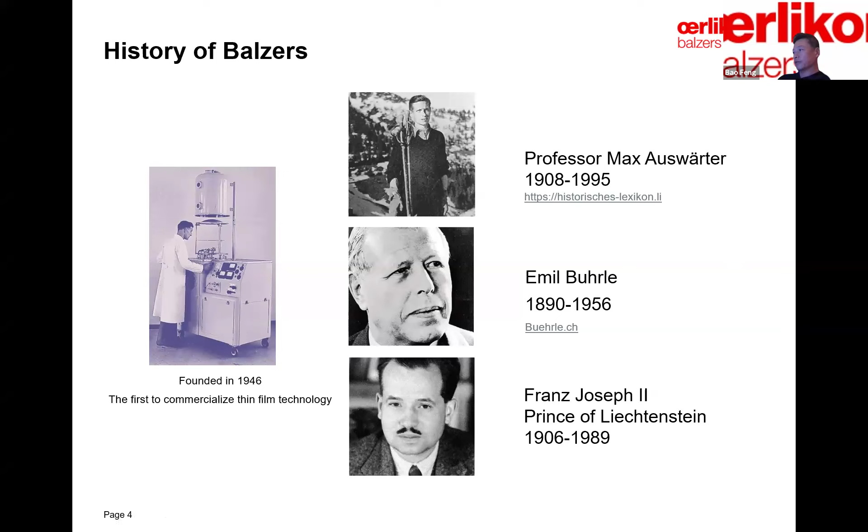Balzers was the first company to commercialize PVD technologies for industrial applications. You can see that small bell jar-shaped coating reactor in the 1940s and some manual operations around it. The company was founded by three brilliant individuals: a university professor from Liechtenstein, the CEO of Oerlikon—the mother company at that time—and the Prince of Liechtenstein. If you're interested, feel free to check out their bios from the internet. I believe there are some interesting stories behind each one of these individuals.

And of course, over time, our company has grown to a much bigger size. Now we have over 5,000 employees around the world in 37 countries, and we have over 1,300 coating machines installed around the world. We're truly a global company at this point.

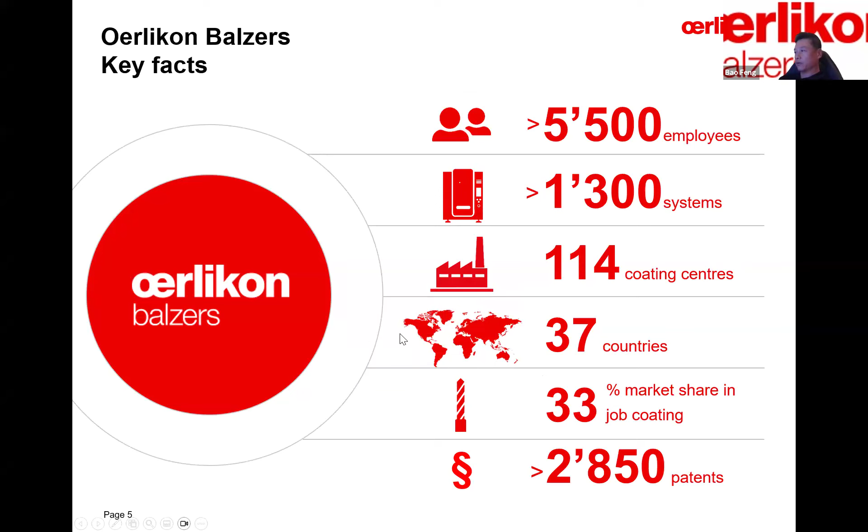So the market segments we cover are pretty much everything: cutting tools, molding tools, automotive components, aerospace components, medical, semiconductors, even luxury goods with decorative coatings. If you look around yourself, most likely some items are either coated by us or our coating has been involved in the manufacturing processes for those products.

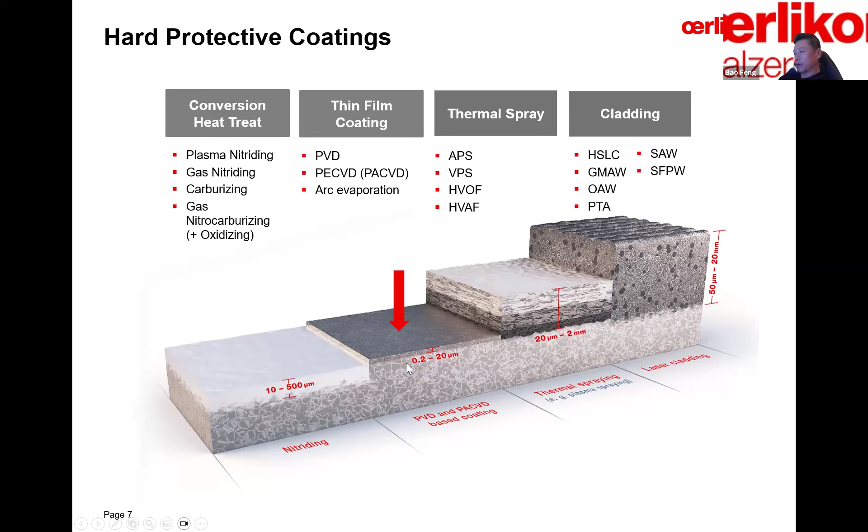What kind of products and services do we provide to our customers? Under the Oerlikon umbrella, these are the coating technologies we offer: we provide coating material, coating services, and coating equipment. For Oerlikon Balzers, we especially focus on this red arrow pointing to PVD coatings. We also do a little bit of conversion coatings, like plasma nitriding and carburizing. Those techniques we typically use to provide strong support for the PVD coating on top, for some special applications.

When we talk about PVD coatings, its materials family has a set of special properties. One of the special properties is the thin geometry. Take a human hair as an example, it's 100 microns thick, but typical PVD coatings are sub-micron to a few microns, a very small fraction of a human hair.

For that reason, a lot of our customers take advantage of PVD coatings. They use it as a band-aid solution, meaning they don't need to change the component geometry to accommodate the coating thickness. They can simply apply this coating on an existing design to see if it will work better or solve the issue. That's also the reason why people use thin film coatings interchangeably with PVD coatings.

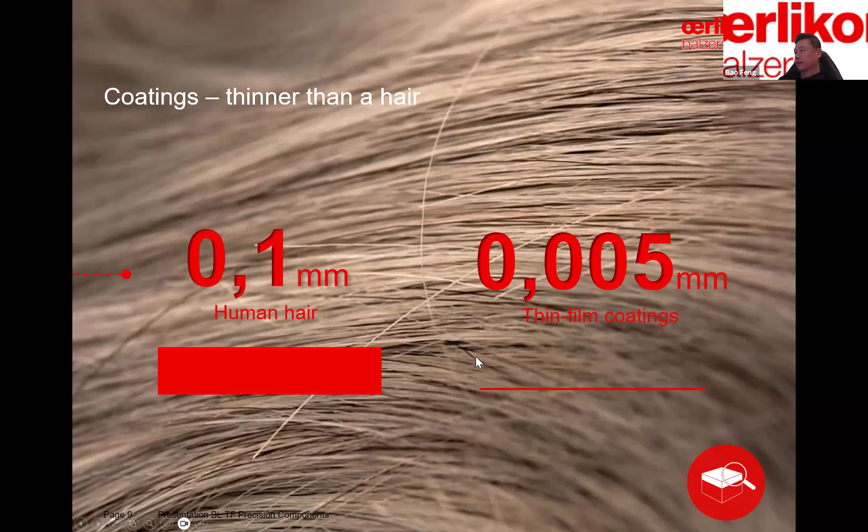The types of applications we normally deal with are often tribological in nature, meaning about friction and wear. For this type of application, we're dealing mostly with two material categories. One is crystalline ceramics, mostly cubic structure, transition metal nitrides, carbides, or oxides. Their properties are straightforward - very hard and non-metallic. So they can provide erosion resistance, abrasive wear resistance, adhesive wear resistance to the components, and sometimes oxidation resistance because ceramics in general are inert to the environment.

So I will spend more time talking about the other material category, which is carbon-based coatings. They're mainly made of amorphous carbon. But at the same time, they contain some sp3 electron bonded structure, like we find in diamond, and some sp2 electron bonded carbon, which we often find in graphite. I believe this content is normally in short range order, meaning they're very small, and there's a very small quantity of them in this type of material.

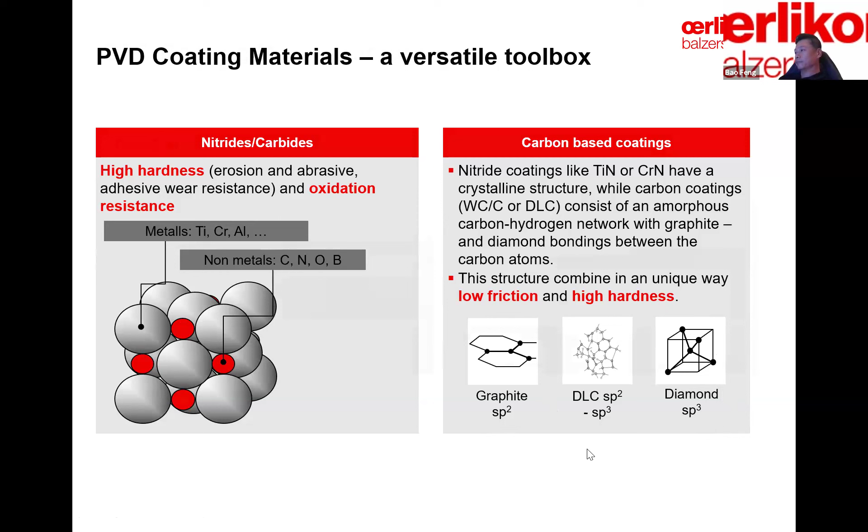For materials engineers, this is probably exciting, but if you're not a materials engineer, I'm sorry to bore you to death. This is titanium doped amorphous hydrocarbon, or titanium DLC. This is a cross-sectional high-resolution transmission electron microscope micrograph. You can see the atomic level resolution here, and those clear lattice fringes representing the titanium carbide crystals.

On average, the size is about 2 to 5 nanometers, embedded in an amorphous carbon matrix. So this is proof of this nanomaterial - look at those clear lattice fringes, really impressive. And why does nanomaterial matter? Because typically nanostructured materials bring in a different set of properties, for example higher strength, higher crack resistance, or different surface energies. These properties can be used for material improvement or different functions.

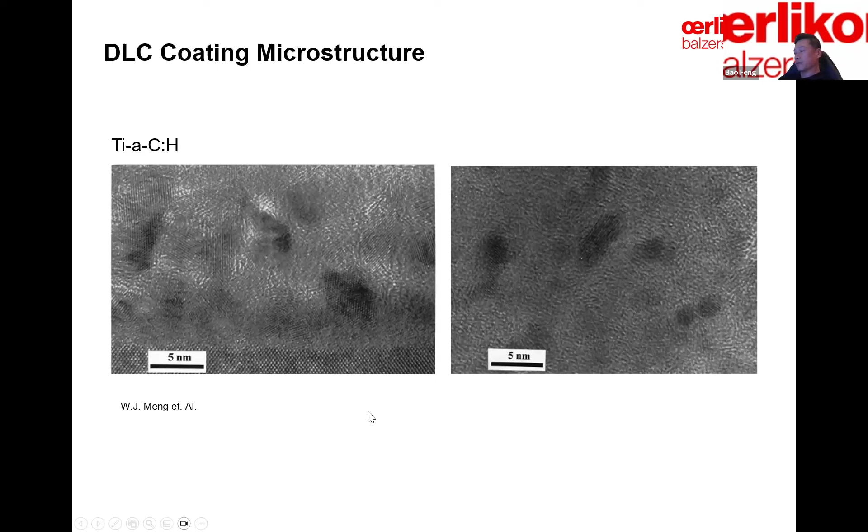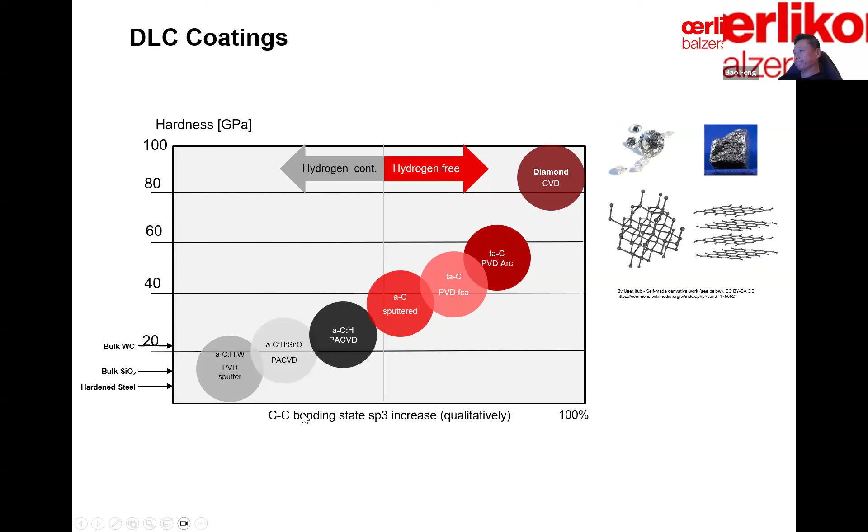So we talked about the thin geometry and extreme hardness of DLC. Another special property of this coating is low friction. This is an early study by Ken Holmberg, the author of the coating tribology textbook.

He was trying to compare DLC coated steel against non-coated steel in a sliding or tribometer test, a reciprocating linear tribometer test, also under different lubrication conditions - dry versus oil 1, a mineral oil, and oil 2, a hydraulic oil with EP additives. The key point here is that with the DLC coating, you can bring the friction coefficient of the steel down from 0.6 level to about 0.1 level, similar to the reduction when you apply traditional oils or oils with EP additives.

So what that means is for some dry contact conditions, you can use DLC to replace the traditional ways of lubrication.

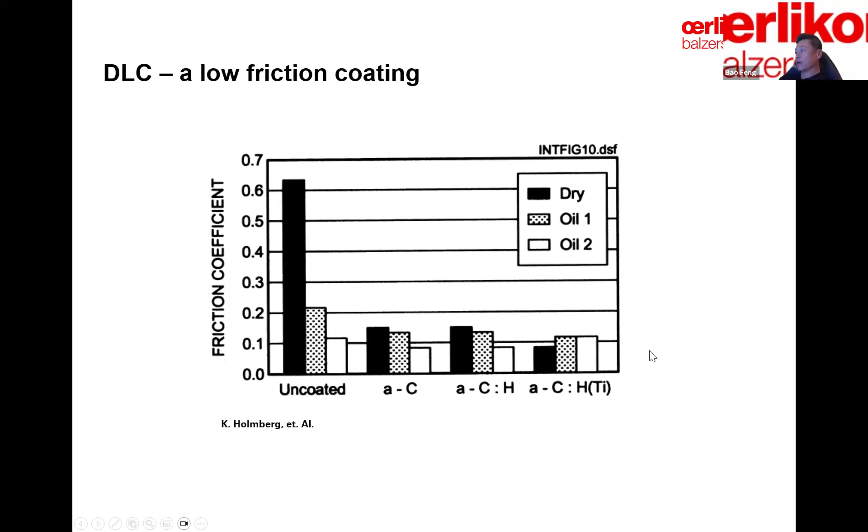So why is there low friction for DLC? People at Naval Research Lab performed a creative experiment in the early 90s. What they did was use a DLC coated steel ball sliding against a glass slide, and because the glass slide is transparent, they were able to use Raman spectroscopy to look at the contact interface from the other side.

What they were able to see was that during the breaking-in stage, there was a transformation in the transfer film from an amorphous carbon structure to a graphite structure.

Of course, we all know graphite is a good solid lubricant due to its layered structure and ease of shear. We know many of those solid lubricants like tungsten disulfide, molybdenum disulfide, or PTFE. But the difference with DLC is that it will last. It has high wear resistance while providing low friction at the same time.

How does that low friction behavior compare to traditional surface engineering technologies, for example hard chrome or nitriding? As you can see, for hard chrome and nitriding, they started with a high friction coefficient under dry contact, and very soon they have a scuffing failure.

But for DLC, it goes through an initial breaking-in stage with a slightly higher friction coefficient, but then the friction coefficient comes down to a steady state and continues at that condition for a long time.

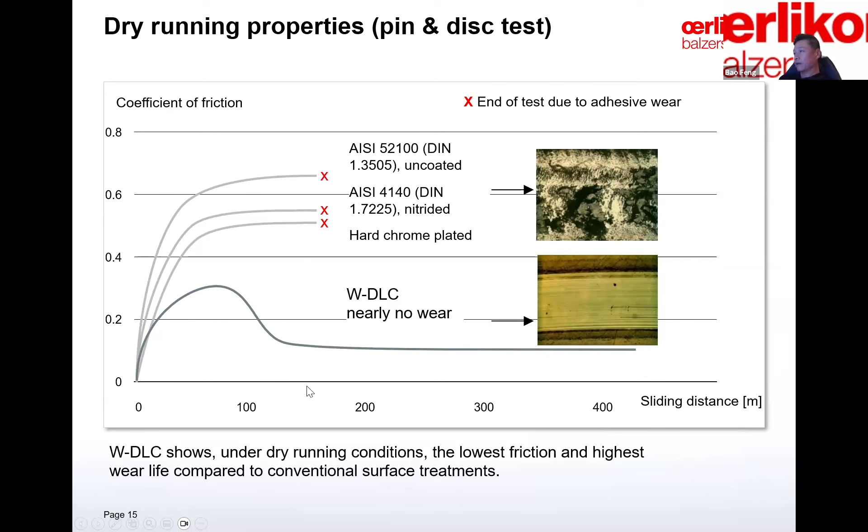So we talked about low friction of this coating system, and I also want to talk about wear, because wear and friction come hand in hand most of the time in our impression.

The reason I bring these aged charts from a study from the 1950s is because the person who conducted this research, Ted Oberle, was a staff metallurgist at Caterpillar Tractor Company in the 1950s, and he was also a member of SAE Chicago. So I didn't make this up, feel free to verify that.

Before this study, people who believed in the classic Archard wear equations assessed that hardness is responsible for the wear resistance of the material. But what Ted, through his experiment, found out is that there's another parameter that is more relevant to the wear resistance of a metal.

He called it a modulus, namely Brinell hardness over Young's modulus. If you put that in the stress and strain curve, you can easily figure out what that means: the elastic strain limit of the material, meaning how much elastic strain the material can take before it breaks. By that definition, it already sounds like it makes a lot more sense, right?

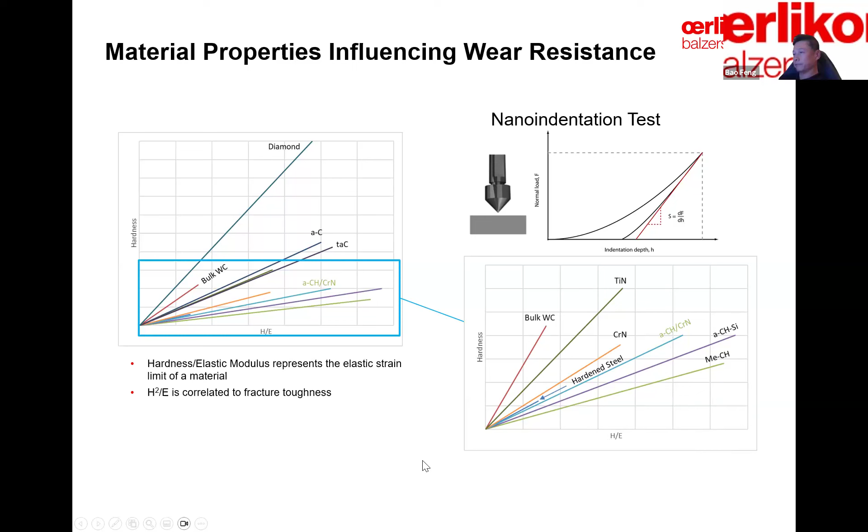So I mentioned DLC has low friction and high wear resistance, but I'm not suggesting DLC will not wear. As a matter of fact, all materials wear, even diamond wears.

But most materials wear in engineering applications by creating debris particles, and those debris particles, if not brought out or flushed away from the contact interface by lubricants, will become wear particles and accelerate wear.

But the DLC type of coating is different. We start from an engineered surface where, under a microscope, no surface is perfect, so you still have peaks and valleys. The coating, because it's so thin, will follow these surface contours. While the coating is breaking in the counter surface and also breaking itself, it creates debris particles, mainly through the graphitization effect, which will fill up the valleys of the counter surface and form a transfer film with low friction properties.

So this is a different mechanism provided by the DLC type of coatings compared with traditional contact surfaces.

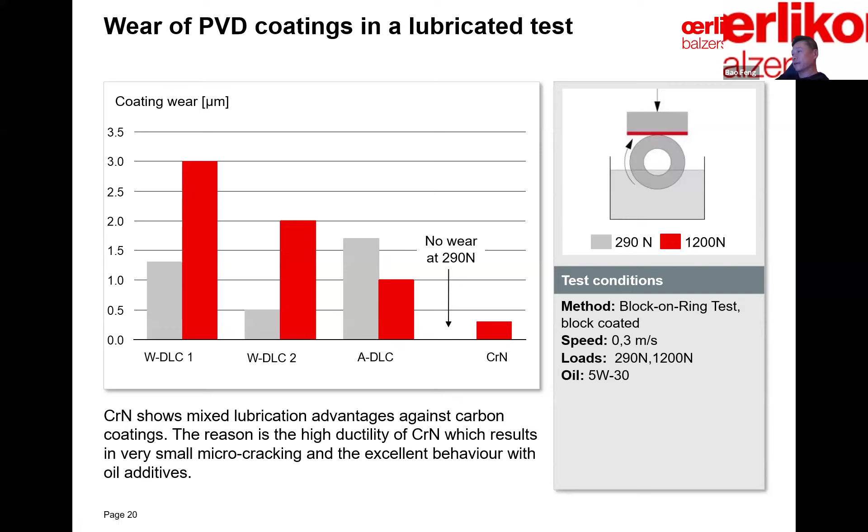This is a lubricated wear test. We have different DLC coatings side by side compared with PVD deposited chrome nitride coating. Surprisingly, because we mentioned low friction and wear resistance with DLCs, in this case at low contact pressure level, the chrome nitride coating has almost no wear. So we did a further study and found out there are micro cracks on this particular chrome nitride, which facilitate a lubrication reservoir at contact. We put that on a classic Stribeck curve.

The Y axis is the friction coefficient, and the X axis is the lambda ratio, which describes the lubrication conditions. On the left side, you have asperity contact, high pressure, low speed. You squeeze the lubrication films completely out. You will rely on the DLC type of coating to provide the lubricity.

And you move to the right, coming to the mixed lubrication regime, where you do have a little bit of lubrication, but at the same time you still have asperity contact. That's where that special chrome nitride coating will work best.

And keep moving to the right, you get into the elastohydrodynamic lubrication regime, where you have full oil film separation between the contacts, between the surfaces. At that point, you no longer harvest the benefit of the coatings.

This is a typical contact condition for automotive applications, where you have low contact pressure but high speed. But also keep in mind that you also have frequent start and stop conditions, where you throw the contact lubrication conditions back and forth between boundary lubrication and hydrodynamic lubrication. In other words, you still need the coating protection for the components.

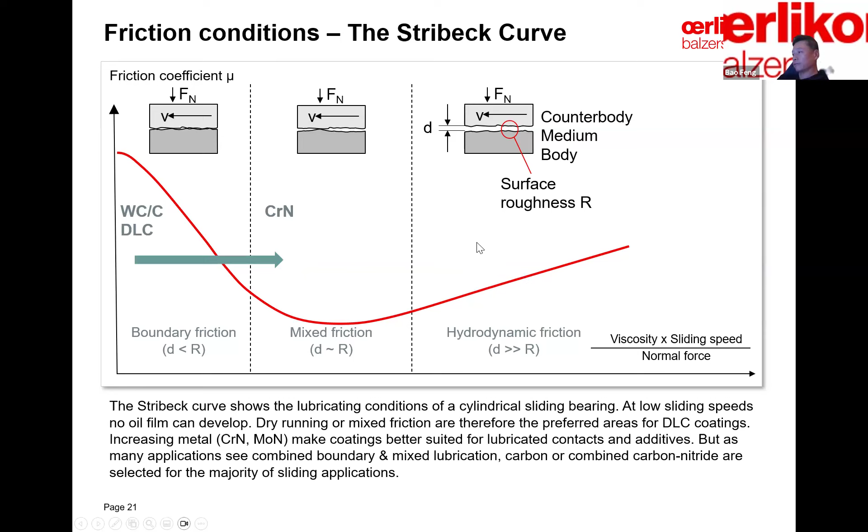Sometimes the corrosion resistance of the material of the coating is very important. PVD coatings, because they're really thin and have some natural porous structures, will allow some corrosive substance to go through the coating and start corrosion at the substrate and coating interface. At that point, your coatings will start to come off.

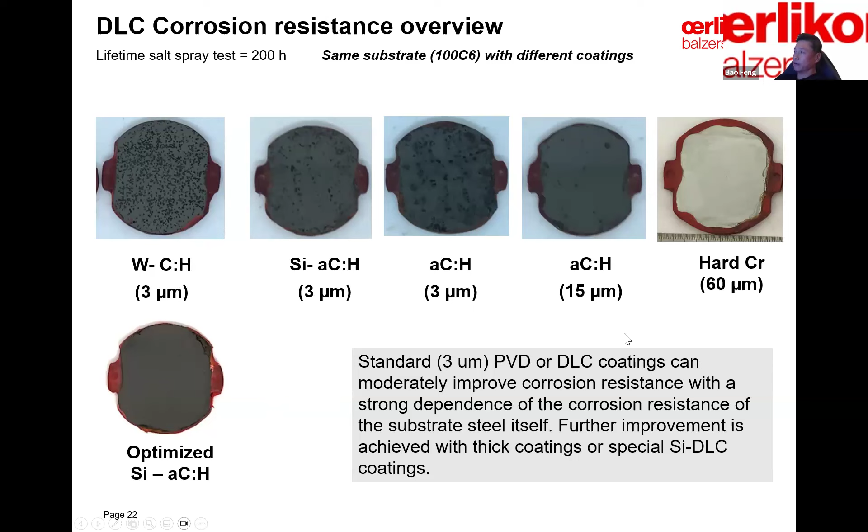Some of the tribological contacts are designed in electrical fields, or some of the surfaces are actually used for electrical applications, right? So that requires we have coatings with different electrical conductivities. We have titanium nitride, very conductive, close to the conductivity of iron. And we also have some options like silicon-doped DLC that has dielectric properties similar to typical ceramics like zirconium oxide.

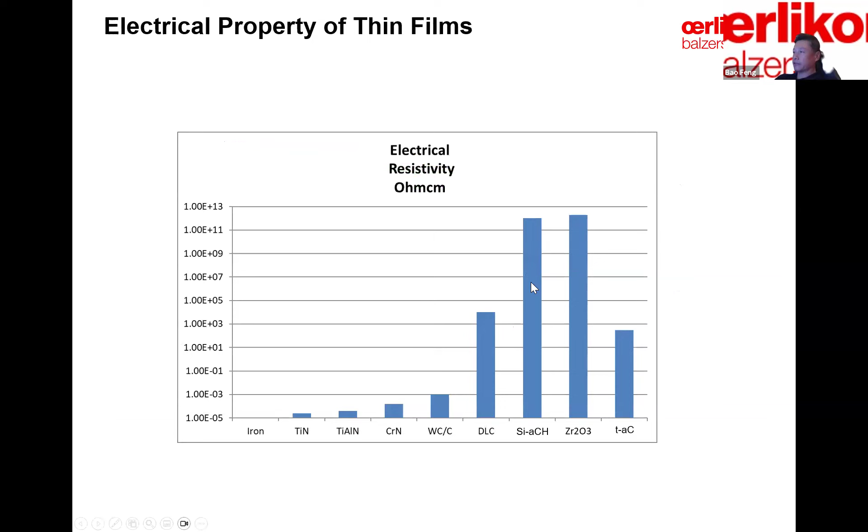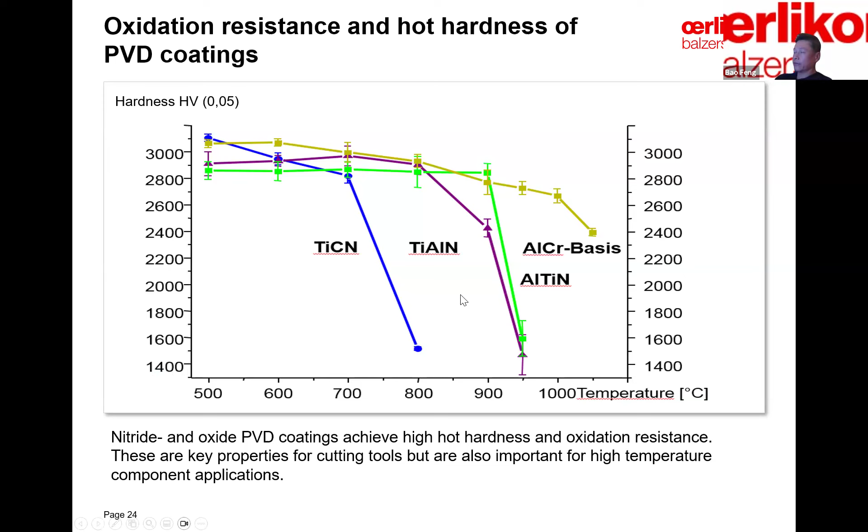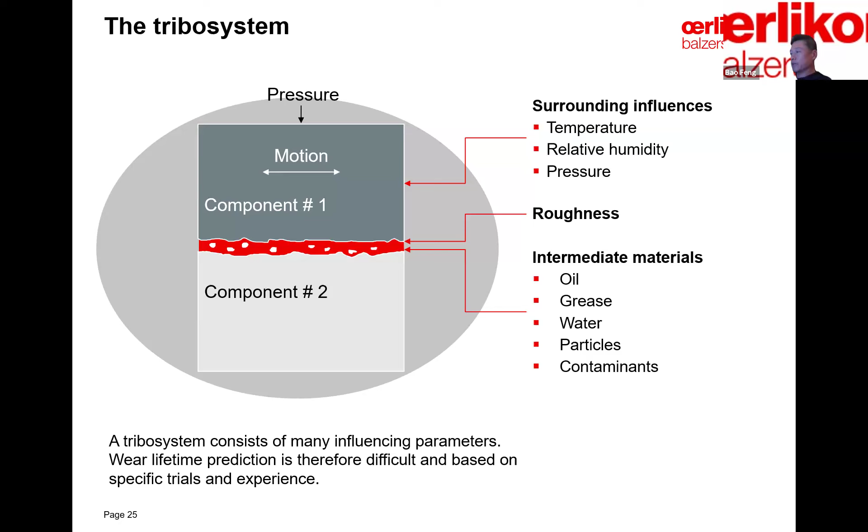So I brought up the idea of wear and friction, not as materials properties, but as system behavior. When we look at tribological systems, we not only look at the materials, but also the lubrication, the grease, contact pressure, the speed - everything counts, right? So that's how we analyze a tribological system.

And also in terms of wear, especially for a primary wear mode, there are so many different kinds, like abrasive wear caused by hard particles, adhesive wear from metal-to-metal contact, and fretting and pitting. You can see all these types of wear in the field, but the good news is many PVD coatings can provide protection against these wear modes.

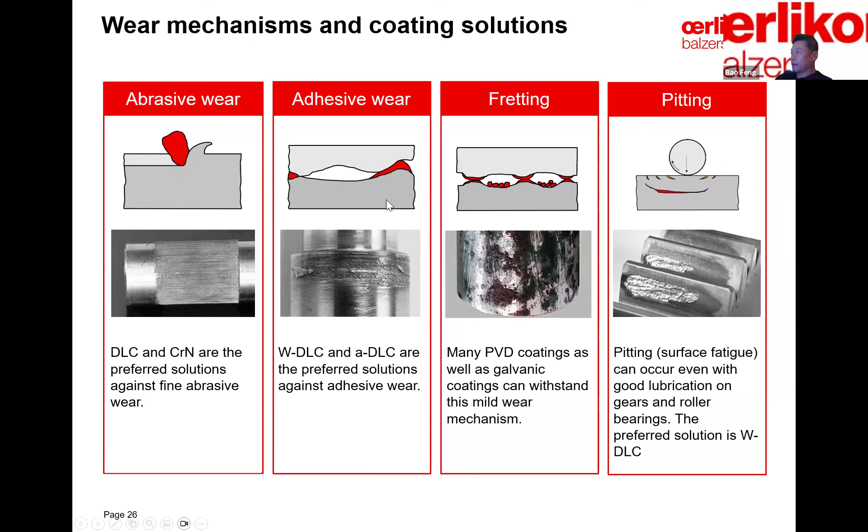And they extend the life, reduce the friction, and extend the life of the components. So to this date, I can say most of the tribological issues connected with coatings and surface engineering have been studied. It's pretty much exhausted in the research field or even in practical applications, and there's no need to reinvent the wheel. We can analyze the contact condition and easily come up with an optimized surface solution for it.

Another point is we always promote this idea to design engineers of components or machine systems: that coatings are a design element, right? That means we need to consider the coatings at the design stage, so that way we can maximize the benefit of coating. For example, if we consider the coating can reduce friction, we can reduce the size of the components and improve the power density. That's just one of the examples.

As opposed to the band-aid type of usage of coatings, like we previously mentioned - that's not very often going to maximize the benefit of coatings.

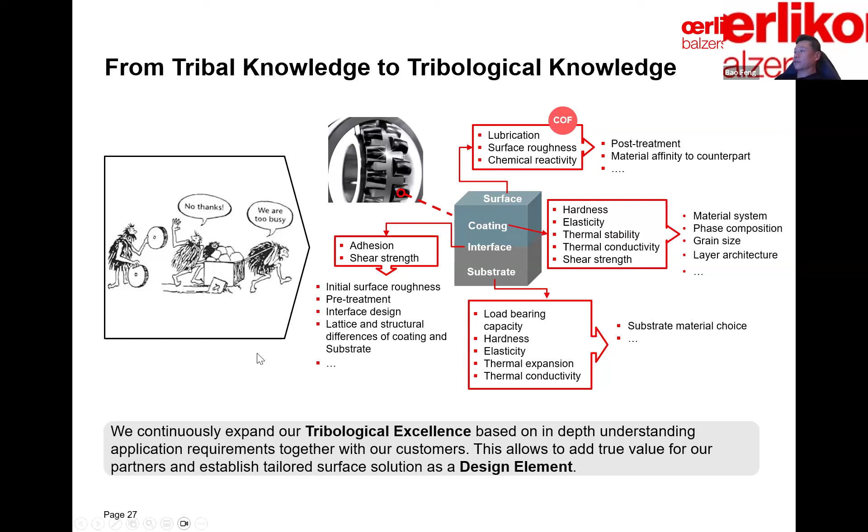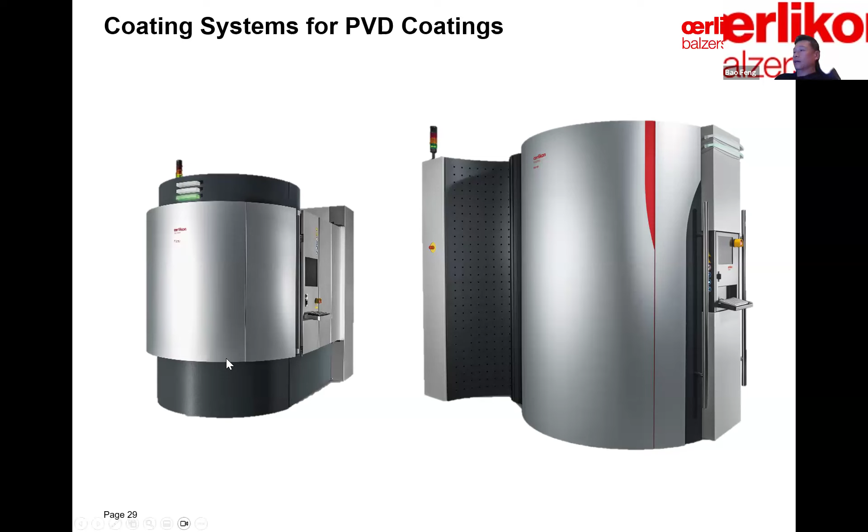So we'll switch gears and talk about the coating deposition processes. The coating is delivered in a high vacuum coating chamber, like one of these. From the outside, it would look like a heat treat furnace, but inside you've got sensors, coating sources, and vacuum pumps. Inside the coating chamber is a phenomenon called gas discharge, or glow discharge.

If we all learned physics, we know Langmuir - he is the first person that named this phenomenon plasma. Of course this is different from the term used in the medical field. The plasma here refers to the quasi-neutral gas phase with similar numbers of electrons and ions. While the electricity across a thin air breaks the gas molecules into ions and electrons, it will emit light - it's like a similar effect to the polar lights.

So you can imagine in the coating chamber there's this green colored coating source, and also the sample table in the middle, where it carries the substrate and creates 1x, 2x, or 3x rotations. The purpose is to have the to-be-coated surface evenly exposed to the coating source.

So this is a line-of-sight process, meaning wherever in the coating chamber can be seen by the coating source will get coated with good quality coating. Otherwise, that surface will not get coated, or will get coated with poor quality or very thin thickness. So you can consider that's the limitation of the coating process. I guess no technology will work for everything - this is an example of that.

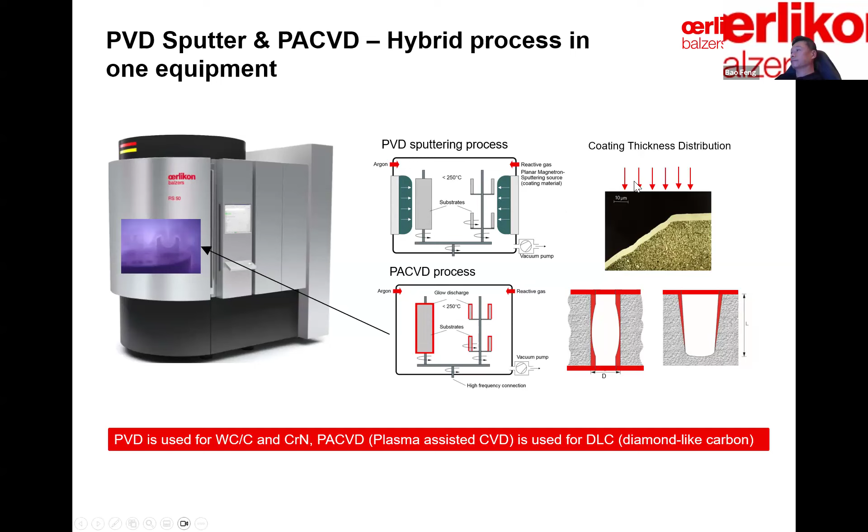So in terms of compatible substrate material, actually it's pretty wide span, if you will. The PVD coatings can get onto different hard metals or soft metals, ceramics or non-metallic materials like polymers or plastics - all kinds of substrate.

But one thing you don't want to coat with PVD coatings is porous materials, because the pores on the material absorb moisture or oil and other contaminants. During the high vacuum process, they will outgas and cause contamination and poor coating quality. So porous material is something we certainly want to avoid for the PVD coating process.

So next, I want to talk about a few examples for automotive applications. I like this slide because it gives representative applications for almost every scenario, every industry.

For example, in the automotive industry, we started with the engine piston liner, piston rings, and wrist pins. In this condition, we're trying to avoid scuffing failure and reduce friction to improve efficiency. So DLC and chrome nitride, specifically chrome nitride, is very often used in these scenarios.

Also diesel injection applications for injectors and pumps. I would say 20 years ago, this system would work fine without coatings. But with new emission regulations and the requirement for higher efficiency, these components were made with much tighter tolerance, we're talking about a few microns. So metal-to-metal contact will instantly cause a seizure, and DLC type coating is kind of a standard solution for this application.

And also engine valves, where you have thermal erosion and adhesion issues, which can be mitigated by chrome nitride type coatings, which offer better performance than something like hard chrome.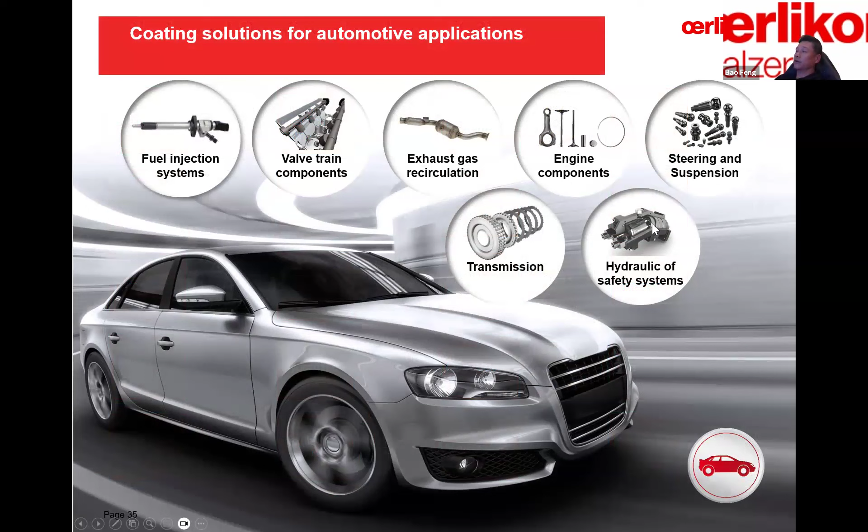I've used a lot of slides to dive into the details here for applications related to automotive, related to cars. I will skip these, they're kind of deep dives. I will try to skip these few slides to save some time, but feel free to review them offline after you get the previous presentation slides.

I will jump into this slide, which was probably created in 2018. The main point here is, like I said, the tribological issues or applications have been studied or well established way before this time, maybe a decade or a couple of decades. So for future development, we ought to focus on something beyond tribology. That's the future trend.

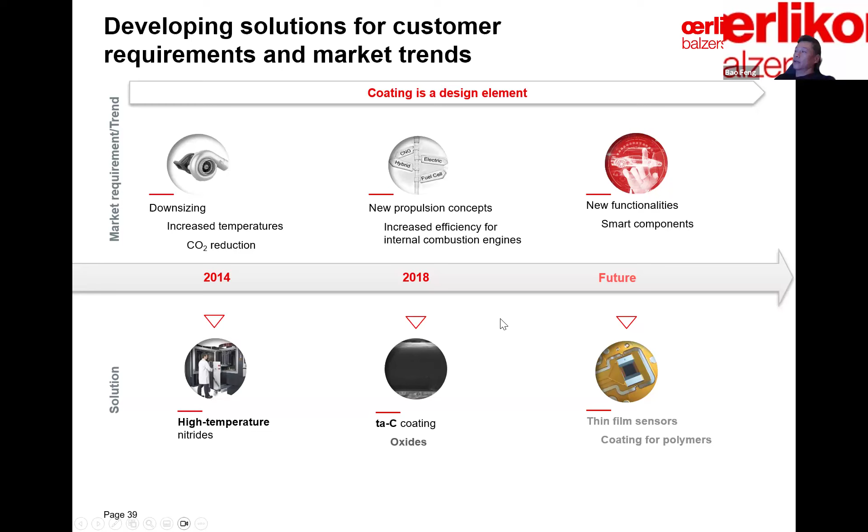For example, some PVD coatings are very responsive, or have a higher, faster response to temperature change compared with traditional thermocouples. And some PVD coatings have a perfect linear electrical response to strains, we can use that as a strain gauge. So we can deposit these PVD coatings on moving components, for example in automotive, in cars, to create onboard sensors.

Or we can use the coating to modify the surface energy or wettability of the surface. For example, for molding tools, I want to create this easy release function between the workpiece and the molds, and also provide wear protection to those molds because the molds are very expensive. Or for plastic gears reinforced with carbon fibers or glass fibers, those fibers are very abrasive to the counter surface, so we will lay down a diamond-like carbon type of coating on top.

To reduce the friction and reduce wear to the counter surface. Or we talk about the electrical conductivity of the coating, it can modify the static charge situation on the surface. So on and so forth, we can brainstorm endlessly for different applications.

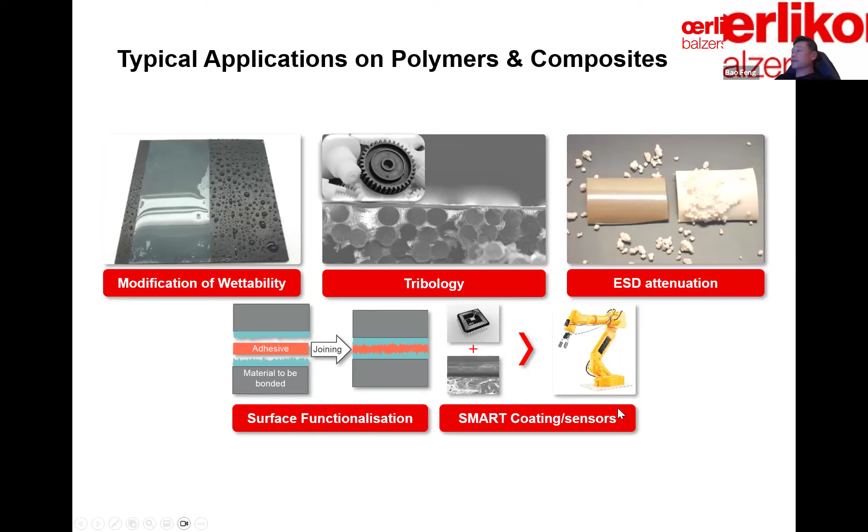And I believe this is the last slide of my presentation. I don't know how many people survived so far, but I really appreciate your time, and congratulations, you probably can get the education credit from SAE.

I tried to salute the big names in tribology and coatings during the presentation, and some of them are associated with SAE. I hope that leaves a mark in your memory. Down the road, if you come across PVD or surface engineering issues or questions, please feel free to get hold of me, I would be glad to offer my help or direct you to a good resource. So with that, I would like to give the floor back to Troy or Tim for any questions the audience may have. Thank you.

Thank you, Bao, that was fantastic. Tim, before we get into the Q&A session, did you have any comments? No, I think it was a great presentation. A topic I did not know a lot about, but it was very detailed, and I certainly appreciate your time.

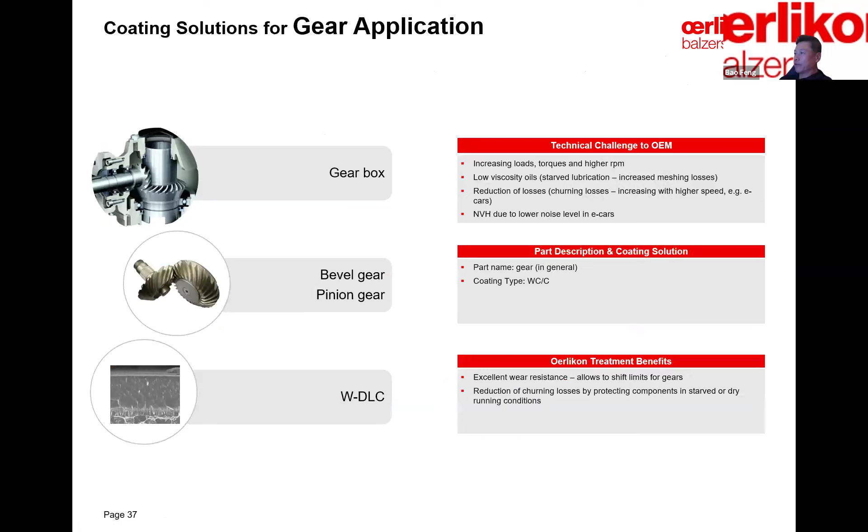Oh sorry, no, that was not what I meant. The H over E—the H stands for hardness, sorry I wasn't clear about that. The H stands for hardness, and E stands for Young's modulus. I was trying to compare that with the Modell factor, which is the Brinell hardness over Young's modulus, delivered in this research by Ted Oberle. Okay, I got it, now that's crystal clear—you're talking about hardness, not hydrogen. Okay, yeah, thanks for the opportunity to clarify that.

Yeah, I guess you're probably not the only one who got confused. Thank you for that. Thank you, excellent presentation, I enjoyed the evening. Thanks for the comments. Yeah, thank you, Buddha. Alexander—Connery, sorry—I think you had a question, if you want to jump in.

Yes, I wanted to know if you had done any case studies on coatings inside valves in highly corrosive environments, such as the petrochemical industry.

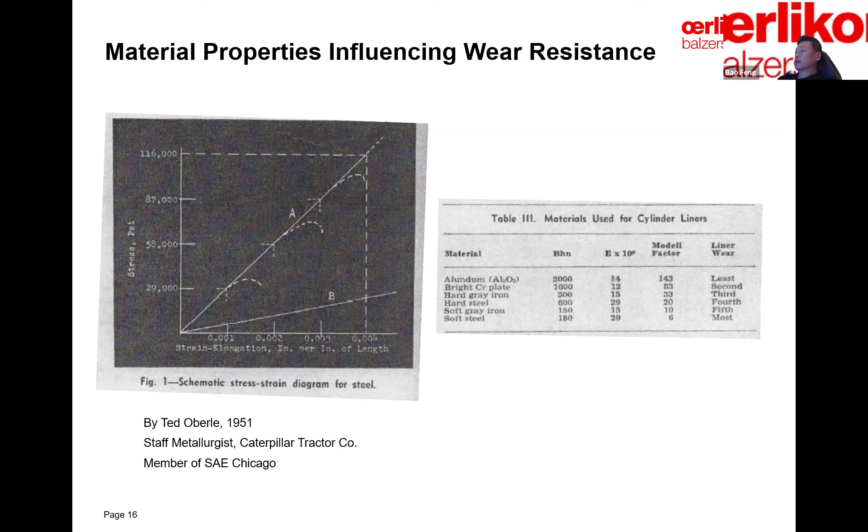And in some situations, PVD coatings are a good replacement for some existing old technologies, for example chrome plating or PTFE. Those are starting to get phased out because of regulations, and PVD and DLC type coatings will be a good replacement. That also holds true for automotive applications. Okay, thank you. Sure.

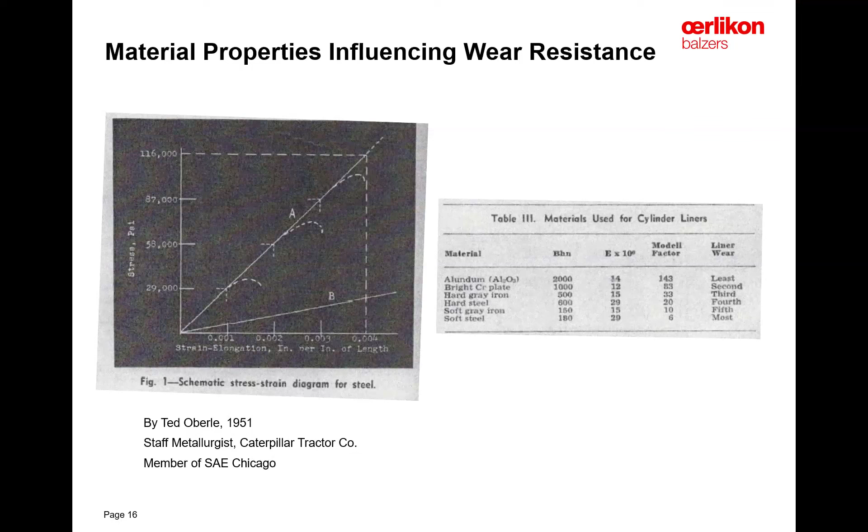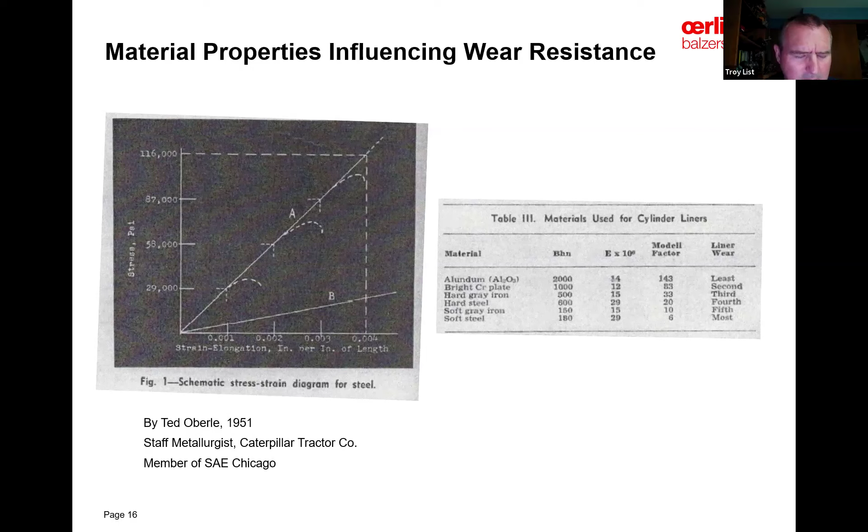Are there any other questions? Bao, I had a question regarding a comment you made, I think, on slide 40.

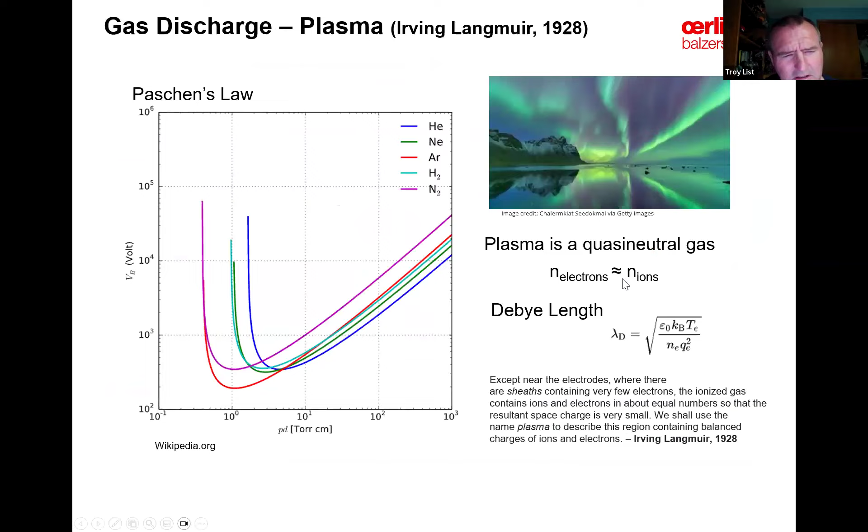The elastic strain properties - were you suggesting there that the coatings could serve as a transmitter, in other words, could serve as a load sensing technology? Yeah, that's exactly what I was trying to lead to. So for onboard sensor applications, the PVD coatings - we believe it would be a good option because it's more sensitive and it doesn't take up space. You can simply coat it onto existing components without adopting a bigger volume, like traditional sensors.

Interesting - is there literature out there on this? I can try to search, I believe you can probably search. Sure, is there no literature, even published literature? There must be a lot of those results already posted out there. But I will do some search and see what I can find.

I don't know what you've done internally there at Oerlikon, but anything you could share, I'd be interested in that. Yeah, absolutely.

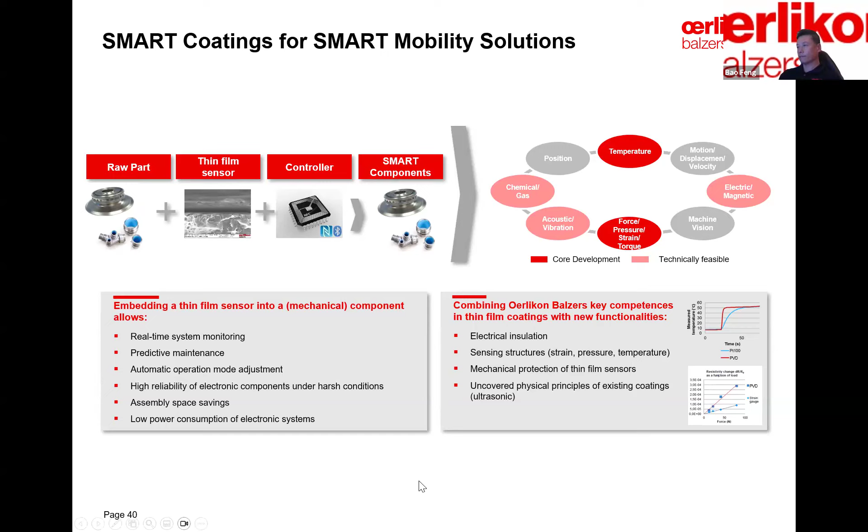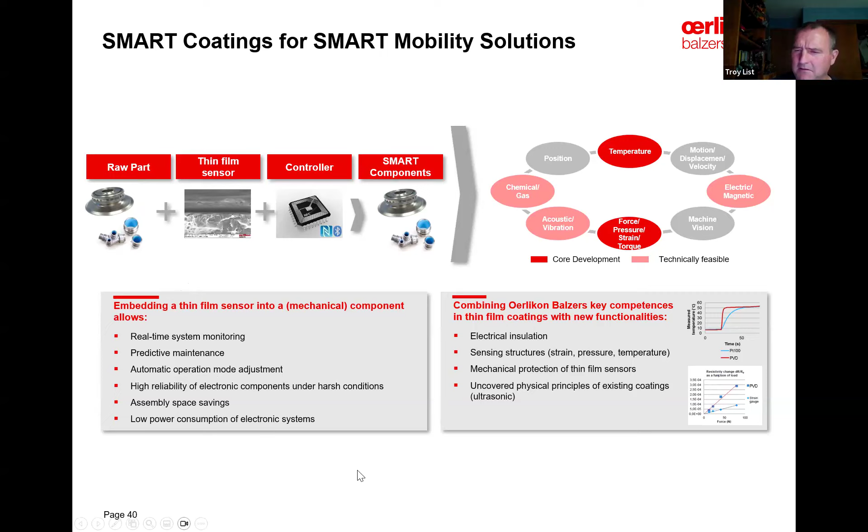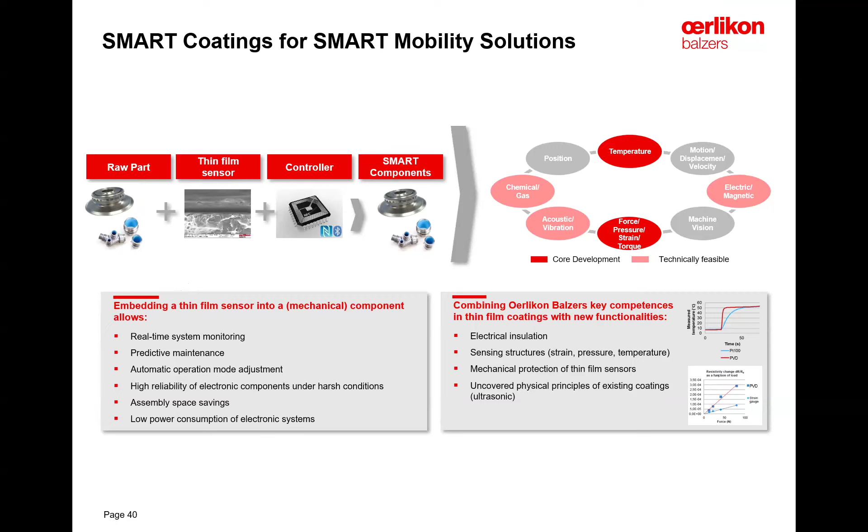Yeah, just real briefly - I've been interested in this concept of antimicrobial, antibacterial protection. I think we see this advertised, for example, for appliances in our home. And I also saw that it was one or two of the items you had, medical devices. Can you talk a little bit about that? Do you have any products that do this, that give some sort of antimicrobial, antibacterial protection? I know this was a big issue in the early days of the pandemic - it seems to have quieted down a little bit, but can you talk about that? Is that something you guys get involved with or not?

Absolutely, thanks for the question. It's truly a very popular application for medical, in the medical field, and we do have a coating already in production. If you go to our website, you can easily find a more detailed description about this coating and coating specs and how it works for antimicrobial applications.

Mainly, you have to dope the coating with some precious metal, and so the precious metal will serve as the antimicrobial functions, while the rest of the coating will serve as wear resistance or other functions. This is a coating solution already we provided in production, so feel free to check out our website to find more detailed information.

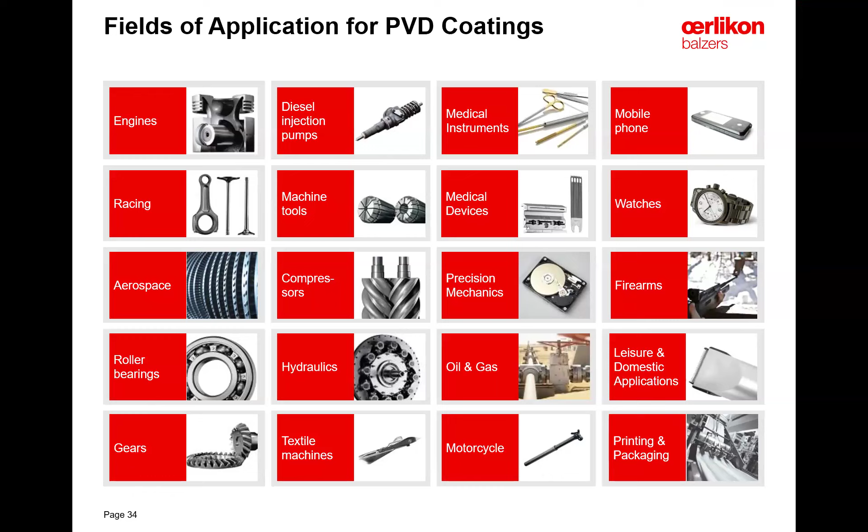Bao, this is Tim Hicks. What's the revenue or the overall sales for Oerlikon Balzers? And then in comparison, what kind of competition do you guys have? Because it seems like you've got a pretty good broad application for your products. It looks like a pretty unique situation you guys are in.

Yes, I used to bring up that the revenue slide in presentations, but for this audience, I thought this is probably more technical rather than commercial propaganda, so I didn't have that slide, and I don't really have accurate numbers in my mind. I think it's somewhere around $1 billion or something, but I believe that number is posted on our website also. It's public, so it's out there.

And you asked about the competitions. It's very interesting because for all these applications, in different industries, they are at a different stage in terms of the S curves of the technology life cycle. Some of them are at the early stage, where Oerlikon Balzers as the leading company in the field of thin films will put a lot of research and development work to develop those applications. But our competitors may or may not have that capability of developing the new technologies. So we're kind of leading in those fields.

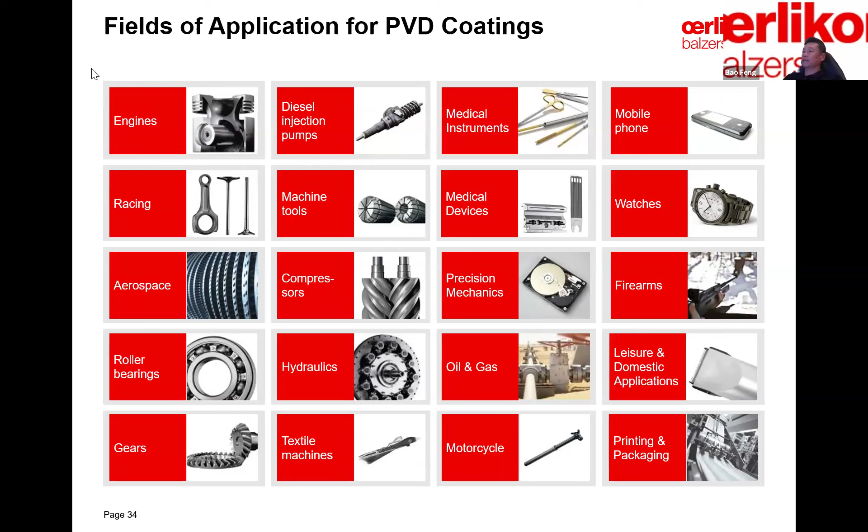Oh, I did, thanks for that overview. Is it a privately held company? No, it's a public company. Public stocks, okay.

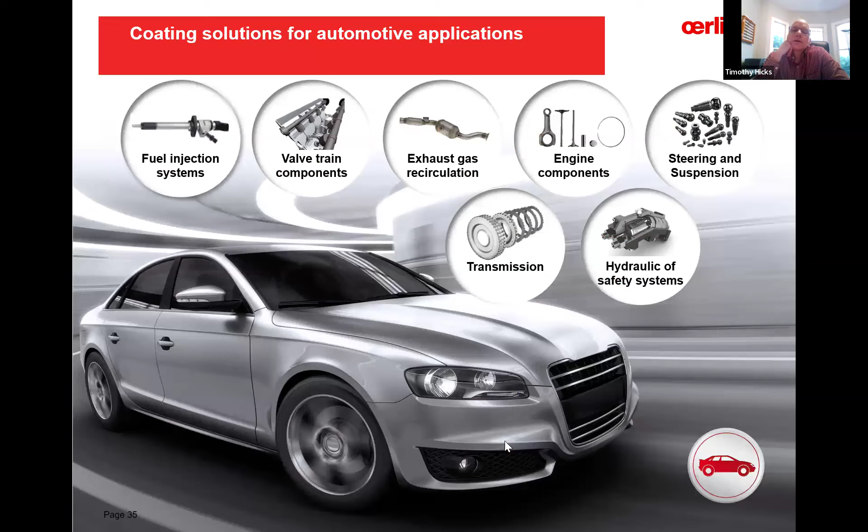And is there a factory at your location in Houston? No, not in Houston. However, if you're in the Midwest, we have many coating centers around the Detroit area, one coating center in Illinois, and overall we have about 19 coating centers in the United States alone.

The closest coating center to Houston is in Oklahoma City, and we also have one coating center in LAX on the West Coast.

That's good, you guys look like you're in all the key areas. So interestingly, Tim, there is a facility that's a short drive from Chicago. Not saying we might hit Bao up for a tour sometime, but we might hit Bao up for a tour sometime. Yeah, I would be more than happy to offer that if you guys are interested. Yep, we have that on the recording, so it's noted.

Who else has questions? I think the slide answered yours, Troy, right? It's aluminum as far as the substrate. Yeah, I think slide 33 or 34 answered the question about cast aluminum as a substrate.

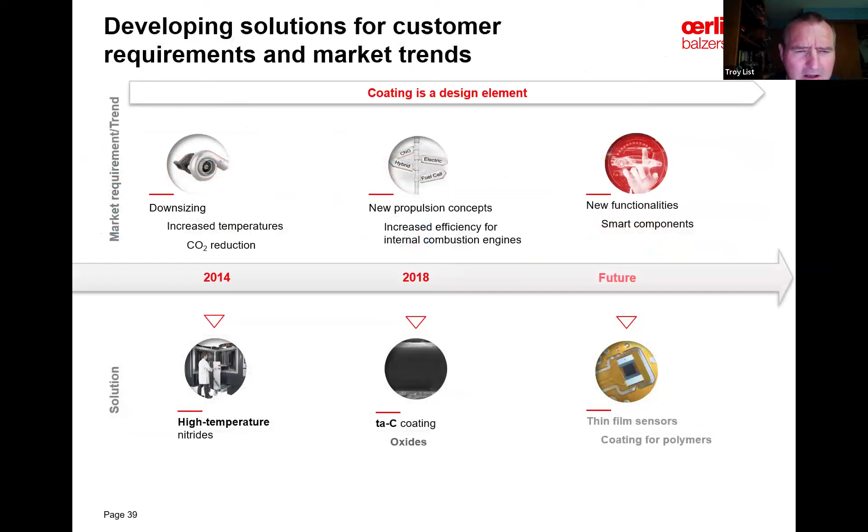Yeah, there might be an opportunity to have a discussion with you sometime, Bao. Yeah, we do coat aluminum all the time.